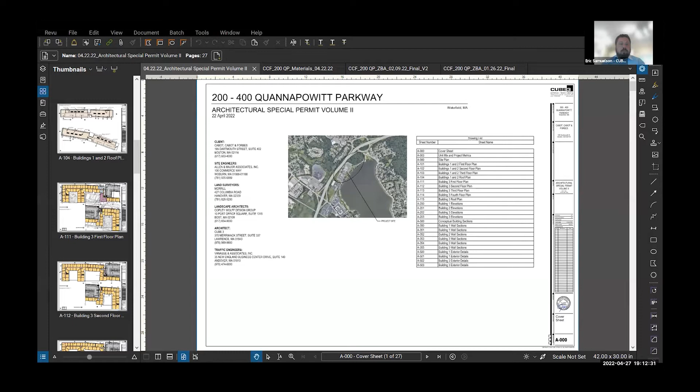So this is our special permit set that we had pulled together with comments from Jim, getting into more detail. I don't know if I need to go page by page through this. I certainly can if everyone would like me to. But the biggest changes from our perspective have been the building 3 elevations. I think the biggest one we were looking at was this west elevation along 95. I think correctly, a couple of comments were saying it looked a lot like an office building, too commercial.

It didn't have any real residential feeling to it. So what we did is we worked to carry the language that was on the other side of this building around the backside here. There are a lot more balconies, more kind of ins and outs with shadow lines, as well as working on the garage facade to give that some texture and feeling as well as it comes across.

So we did some work here. I think we got to a pretty good place with this. The other 2 elevations were the other 2 ends of the building. We had similar comments, and we worked with Jim on doing something similar where we try to carry the design language around and use the same materials, make sure we have balconies and ins and outs, so that this felt like a residential place.

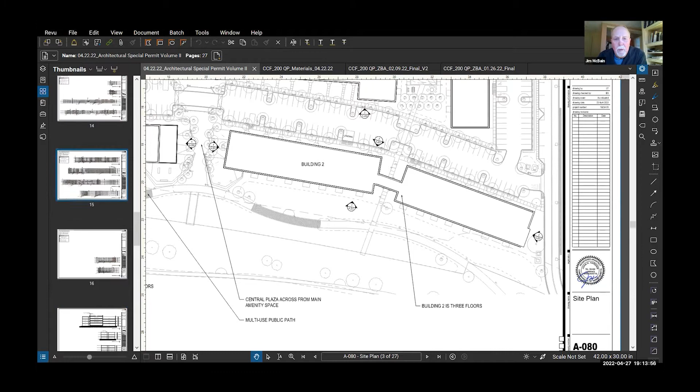So I'll pick up for a minute there, Eric. Yeah, absolutely. As noted, we had several meetings. What you see before you now is, at the bottom, basically the left side, center, and the right side. If you look at the middle sections, you'll see it's just a monotone of windows and a monotone of color on the 128 side. So this has been broken up, with more balconies and a change of color that represents a closer tune to what happens on the rest of the building.

And reflects something more residential than not. We also talked about the ends of this building, which didn't have much, had the same sort of architecture that 128 did. But we gave it, based on my comments, a better edge on those 2 edges. So whether you're coming down the highway or up the highway, you see a continuity from the rear to the edges, and then the continuity continues around to the front. So I'm quite pleased with how this has come out.

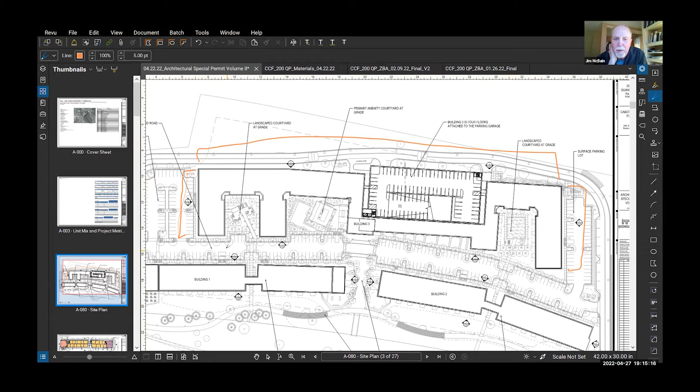You might note one other thing is on the garage. Eric, if you could pull that garage elevation up. It's not just a bunch of decks — it's actually got a detail to it. It looks like little trees, or whatever you want to call them. If anybody's been over to Wellesley College, they've probably seen the copper tubing that runs around one of their garages — well, I say new, it's probably 20 years old now. This is similar, but not copper tubing, obviously. It sort of breaks up the whole garage texture and almost gives a forestry type of appearance.

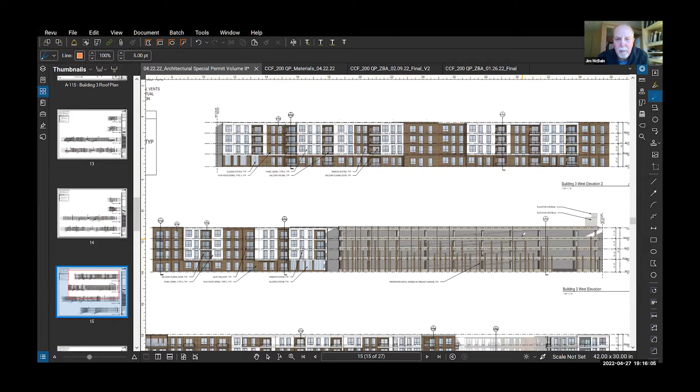So you get a break between what's on the right and what's on the left, and this other element, the garage in the middle, is quite helpful in pulling this together. So I'm pleased with that. Also, as noted earlier by Brian, they've gone through and done cross sections for me, with details and dimensions, so we have them as a guide going forward — when the full details come out, we know what we're getting at this point.

So from what I've looked at here, this package architecturally is in much better shape than it was. I should note the elevations weren't drawn in full originally — there were just some renderings on this side of the building. Now we have the full drawing of this side of the building, which we really didn't have before. So as far as I'm concerned, architecturally, we're there. Thank you.

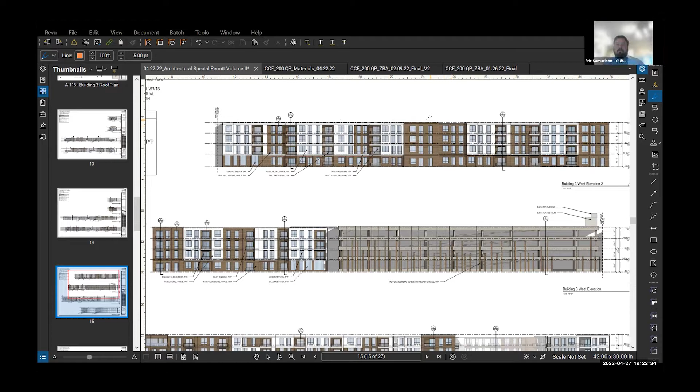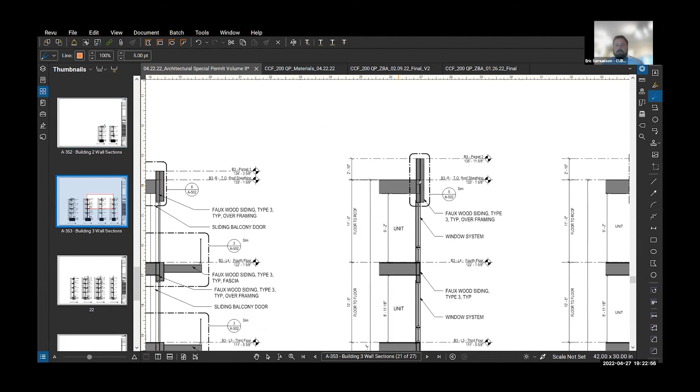Eric, what sort of a parapet, what color, what would it be made out of? Would it blend into this, or would it be? It's this material here. Okay, the material would be consistent, and the roof line would be a little bit below it, behind it. 2 feet, 3 feet, 1 foot? Depends on the area, we have a lot of that detailed. For example, in our wall sections we have all of that. So this one here, you're seeing it's 2'10". Your material would carry all the way up here, so you're not getting a change in material as it gets to the parapet. Okay, thank you.

Anyone else? Okay, what's next, Brian? So if I can ask on this garage issue that Greg raised, is it the board's inclination to see how it looks on the rendering and then go from there, whether you want it thickened up or not?

Does that make sense? I think I would need to, and it sounds like maybe others do too. I think if they put the trees in, there's not that many trees there, but the landscape, once it's in, might show a little bit of contrast.

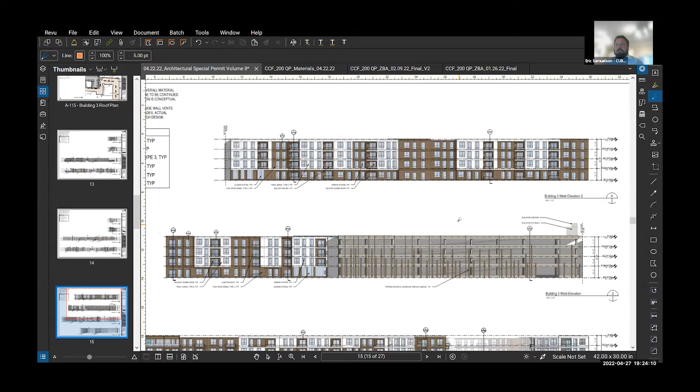Yeah, we can certainly show that. I think one thing I do want to note is that this is an open air garage. If we were to further enclose this side, we would have larger mechanical equipment on the roof to ventilate the garage, and that's not something we want to do. It's not good for the garage or the residents. Open air is better from that regard.

Is that because you'd be putting more of these little tree-like openings up there? Yeah, you need a certain percentage of openings around the garage, so you would have to have more ventilation. Yeah, once you cross a threshold, I forget the exact percentage, but once you cross that, you need to mechanically ventilate your garage.

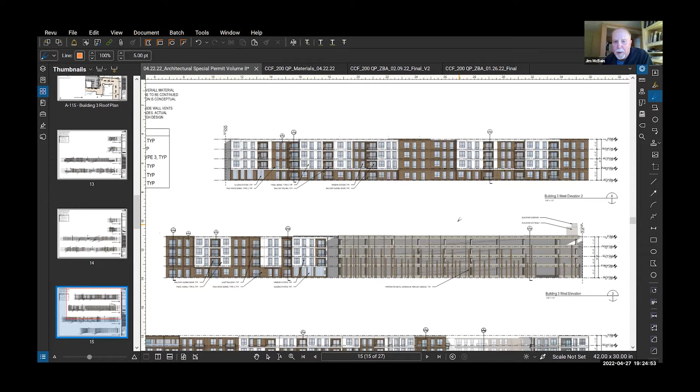There's only one side towards 128 that's open, everything else is enclosed by the building. We do have setbacks on the sides of the buildings between the garage and the building on both sides that allow for fresh air wells between them, and that space there, and that space there.

If it looks anything like that Wellesley building, I remember when they first did it, it was gleaming. This probably won't gleam, but it would be nice to get a better handle on it. Okay, so we think we can get a look at that next time. Yeah, you think you can do that, Eric, within a couple of weeks? Yeah, that shouldn't be a problem.

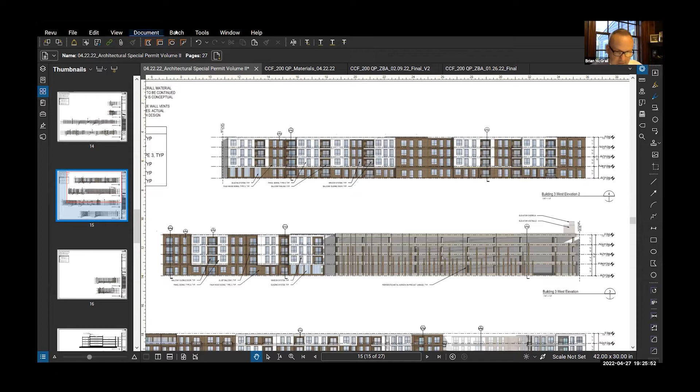Okay, great. Moving on, what we also submitted in our packet last week was the Quannapowitt Parkway improvement plan. That's kind of a boring plan that was really specified by the town engineer, who, as you know, Mr. Chair, is satisfied with it. Do you see a need for me to bring that up? Because it's more like cross sections of roadway and stuff like that. I don't need to see it because I've read and reviewed it, and I'm familiar with some of those details.

But do any other board members have questions about that material that Brian sent us? If so, bring it up and let's try to address them, but if everyone's satisfied, I don't see the need to go through it again. This speaks to the on-site and off-site work. There's going to be some plans I do want to bring up, which I think are important.

The next thing is we submitted a materials booklet. We had gone through materials with you before, but now we have a booklet that is formalized and submitted for the record. I'm happy to go through that, but you've seen most of the materials, so it's up to you if you want me to go through it in detail. It has been submitted. Do we need to show it to the public? Happy to do it, we can go into as much detail as you want.

If you want to bring that up, just note any changes. Because if we've all seen it before, and it's been in public hearing before, but if something changed, maybe point those out. I don't see the need to go too deep, maybe just give a brief review.

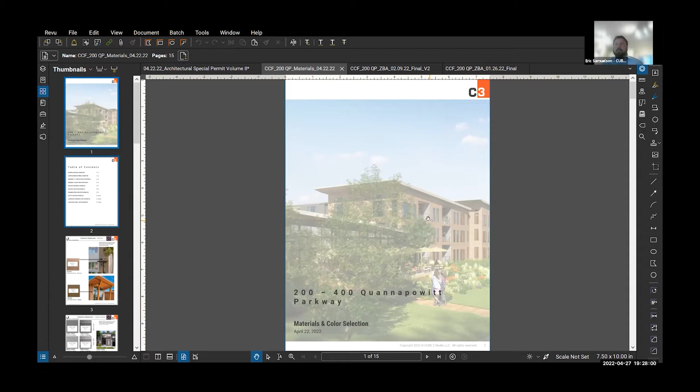So this was submitted. Again, I'll breeze through this. If you guys want me to stop at any point, please feel free. We have a table of contents here.

So for exterior materials, this is the Nichiha we were looking at. It's a vintage wood look. These two images are not of the proposed building, but examples of this product being used on completed projects.

Same thing here. We have James Hardie, a mixture of vertical siding, which is a panel, and some plain lap siding. Some examples on other buildings.

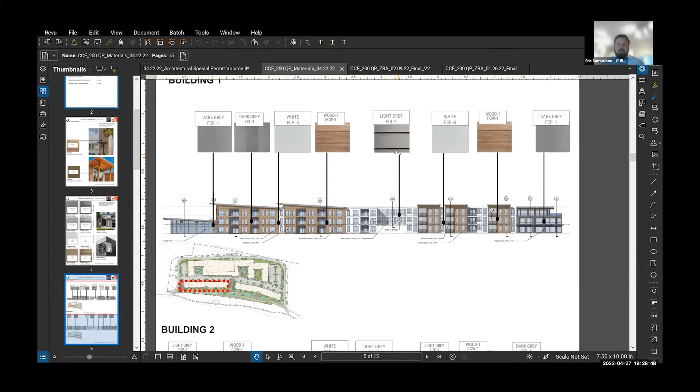And then we just go into more detail with each of the buildings, calling out where these lie, and these also tie back to the permit package that we put together, and there's material tags that tie all this together. So this FCL2, for example, you can see where that's tagged throughout the permitting package. So everything is all tied together.

And building 3. And then we just show some various examples of what we're thinking for the balconies, wire mesh balcony railing, some composite decking, the fiber cement trim and soffit detailing around the balconies.

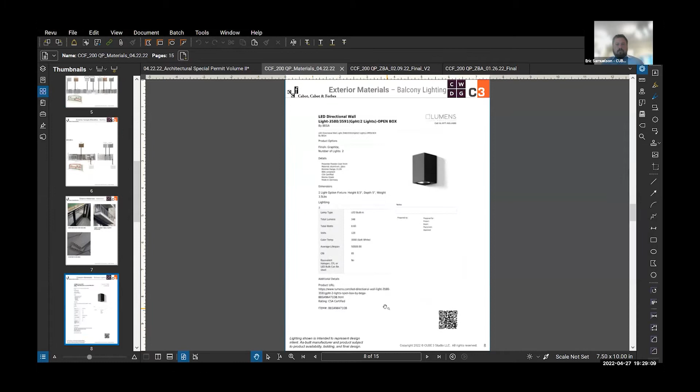Some examples of lighting at balcony that we would propose, building entry style lighting. We have some soffit lighting that would be, a lot of times at the entry or at the breezeways. We have landscape lighting, site and area lighting.

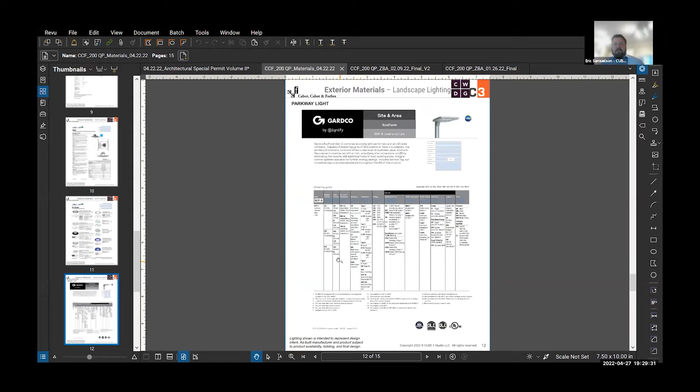More landscape lighting. There's going to be a variety of different lighting for the landscaping. And then the one thing I think we did want to note, Matt, was that all of the landscape lighting, I believe, is dark sky compliant.

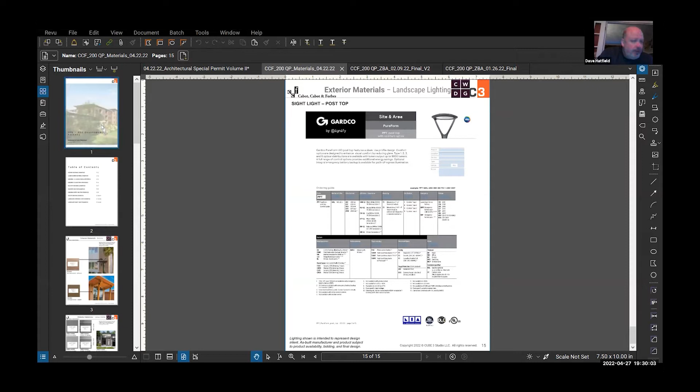Thank you for that. Yep. Eric, you don't have anything on the new garage, right? Is that too soon for that? With that material you just showed us today? For the material on the garage? Yeah, I don't have a material for it.

I can show you an example of a product we can use. I can come prepared with that. There are manufacturers, it would be kind of a screening specialist, I guess. They do a lot of those things, and it would be custom for this project. We need to add that to this booklet. I can certainly bring an example of that. I don't have it in the booklet, no. No, but we need to add it. Yeah, yeah, okay, yeah, that's fine.

Okay, any other comments, questions, board members? Okay, next item, Brian. Great. So thank you, I need the screen.

So as I mentioned, there's one plan. I think it's important. Let me just find it first. That was submitted, not that they're not all important, but this one in particular. Here we go. Hold on, give me a hard time for some reason. Here we go, okay, can you see that?

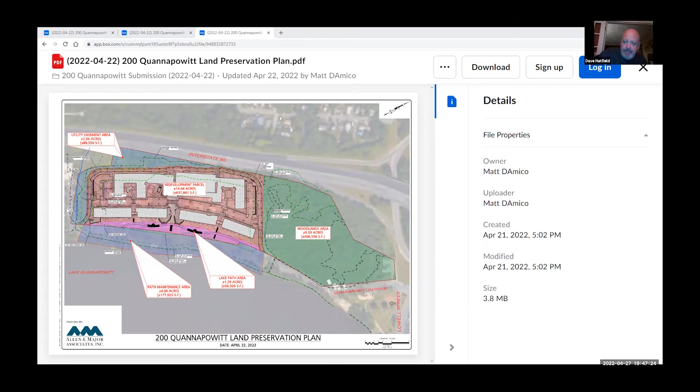Okay, appreciate that. Board members, any comments, questions? No, no. And Mr. Chair, I think that goes along with...

Potentially all the plans that we've been getting, there should and needs to be a plan reconciliation. And just making sure that we don't get caught short, and make sure we know exactly what we're getting or what we're voting on when it comes to voting.

And unfortunately, there's only one guy that I think should handle that, who just made a scoffing noise. But Jim usually tends to do that, to make sure that the plans that we've okayed or have seen, since he's usually often the one that takes the building set and compares them. So I would move that we allow Jim to work with the petitioner as he did with the 128 side and stuff, just to make sure that we got all the correct site plans, all the right plans. Architectural, landscape, they're all up to date. Yeah, they're all consistent, and they're tied into Concom and all these other questions, which just kind of came up.

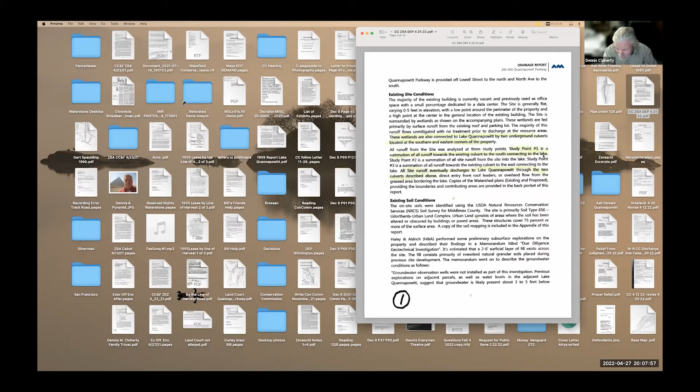It says all runoff from the site was analyzed at 3 study points. Study point 1 is a summation of all runoff towards the existing culvert to the south connecting to the lake. Now, I don't believe that's a true statement because Mike Collins, when I was on the Quannapowitt Study Committee, gave us this map, and it showed that the outside on the lakeside was 187.54. On the inside culvert it was 185.46.

Now water doesn't flow uphill, and that means the water is going this way. And here is Richard Hartley from Fish and Wildlife Massachusetts, and he says that if I call your attention to, there are over 20 pipes leading into the lake. Walker's Brook is no longer entering the lake, and there's elevated lake levels.

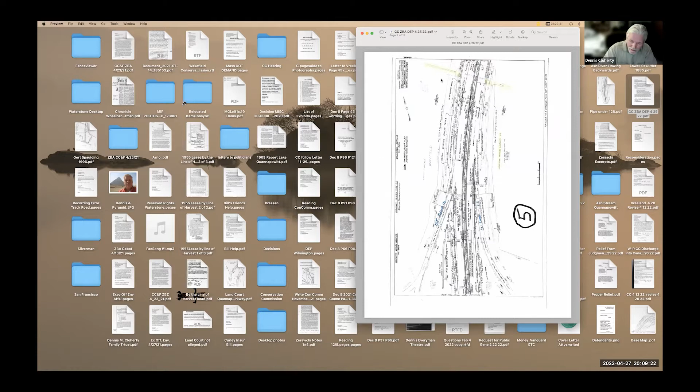And here's a picture of the so-called outlet, which shows the land above the culvert. And here is a picture from Mass DOT showing the water flowing towards the Reading drainage canal. You see the direction, the arrows there? Yeah.

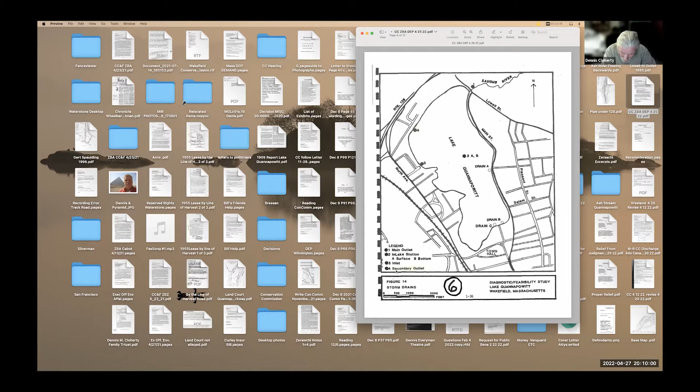And here, Camp Dresser and McKee did a study for the town of Wakefield, and they listed, it shows the main outlet at the Saugus River on Lowell Street. And they said this was a secondary outlet, number 4. And I live in the old fairgrounds, and my property is connected to the lake by an underground pipe.

And my concern is that if the Quannapowitt Parkway is elevated, then that water will drain towards my house. And if I could show you, there's an intermittent stream that flows by my house. That's my back porch, it goes down here and it goes under the highway.

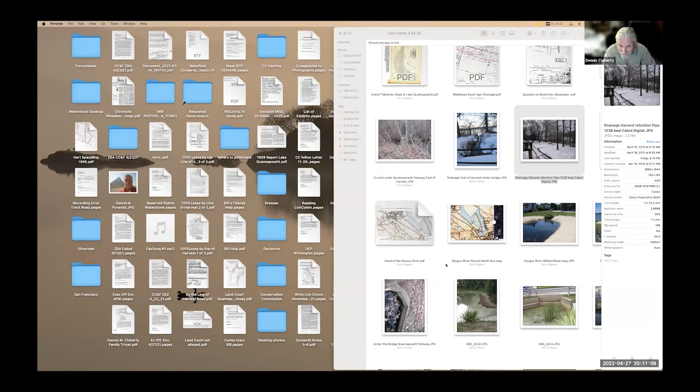Before, this is the Wakefield Reading Fairgrounds subdivision. This is taken up. And this is a map from 1911, and it shows the intermittent stream that connects to my property.

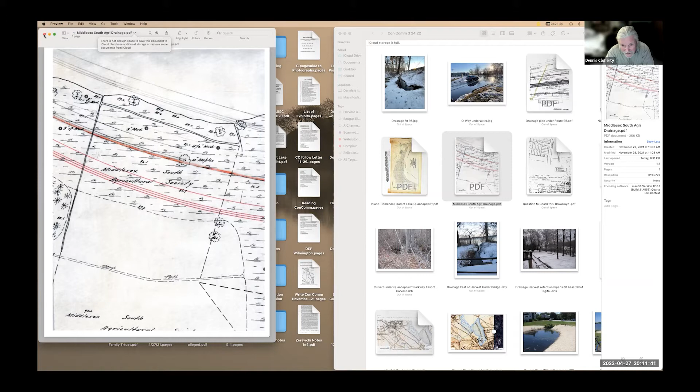And the water is now coming from this development, this planned development, is coming up the Mass DOT drainage ditch. And it's getting very close to my property.

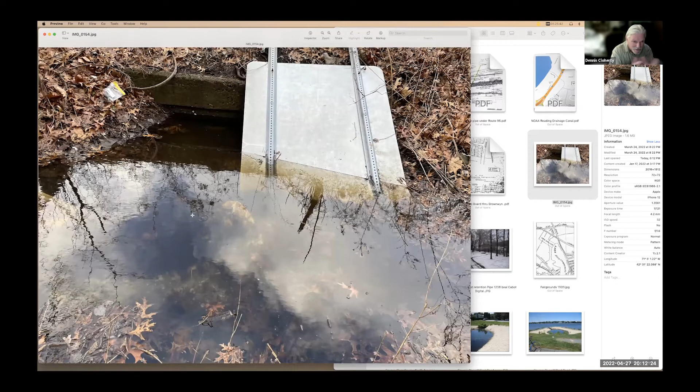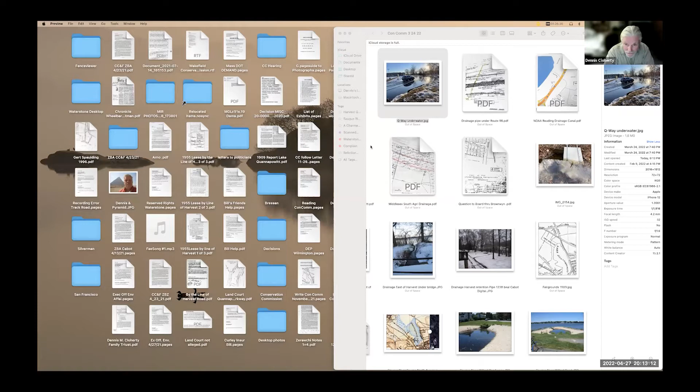And here is the end of the property. This is where the drainage pipe comes out, and the water gets higher and higher. And I'm afraid that water is going to come onto, if the land is elevated, that the water has no place else to go but into that drainage pipe and onto my property. So if there could be a solution found to the drainage problem, I'd very much appreciate that. Thank you for your time.

Okay, thank you, sir. Anyone else? Seeing no other hands, we'll close public testimony for the evening.

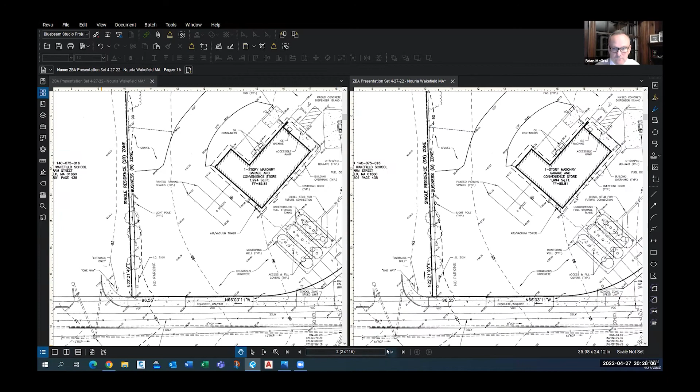Great, so this kind of shows that we want to try to get as much landscaping as we can. We're really improving the landscaping, putting a good grass buffer on the perimeter of the property, some shrubs on the other side where there's really nothing but scrub trees, and really fixing up along Vernon Street. And as I've mentioned, there's a significant planting area on the front of the property. You can kind of see the new layout.

There'll be a new building, and the pumps are more properly aligned compared to the way they are today. I think this might be a good opportunity, Chris, if you want to hop in and give an idea of the layout and the parking, etc. That would be great. Sure, thanks, Brian.

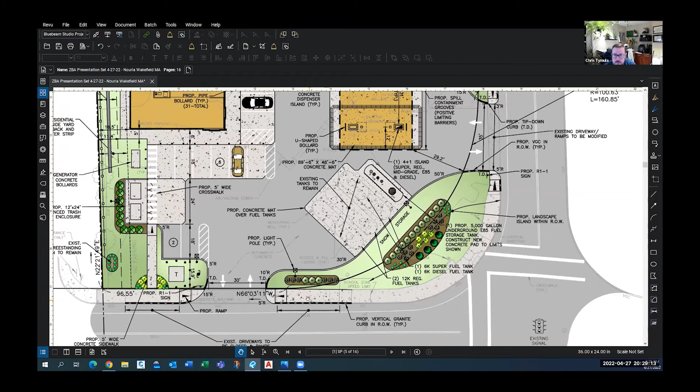As Brian mentioned, the two curb cuts on Vernon Street will remain. We are removing the first curb cut located close to the intersection, and providing a new 30-foot wide full access curb cut further from the intersection. Overall, we'll have drive aisles anywhere from 24 to 30 feet wide. We'll have 18 striped parking spaces, with all the parking spaces against the building protected with bollards.

Obviously, as you can see, the green is the landscaping all around the perimeter. We have a fenced dumpster enclosure, also screened by some landscaping. We have some low growth plantings along the sides of the lot, up at the top on the side. And as Brian mentioned, this is the landscape area we're showing within the town right-of-way.

Overall, we feel it's a significant upgrade to what's out there today. We obviously have a full set of plans, everything from a demo plan through details, erosion controls, full stormwater management. I don't think we want to get into all that this evening. I just want to give the high level picture of the development.

In addition, there's a chain link fence running along the back and the side. We are removing that chain link fence and providing a new 6-foot high stockade fence, a solid stockade fence. There are existing freestanding signs located here and here; those would also remain, but just be refaced with the new Nouria brand image. And altogether, we feel it's a significant upgrade to what's out there today.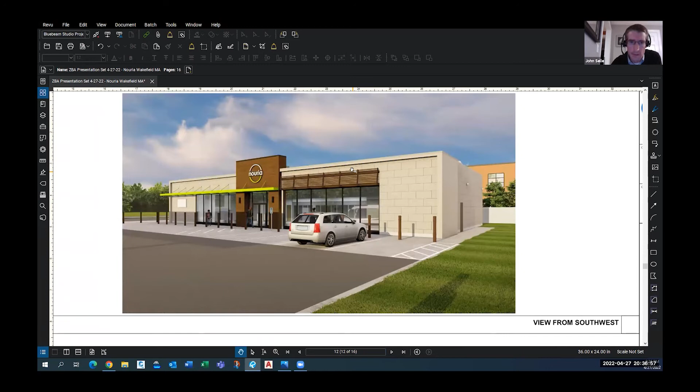You're seeing the main entry accented by the wood-look material and the raised height parapet with the Nouria logo signage above the branded Nouria green trellis canopy element. Again, these large floor-to-ceiling storefront windows really bring a lot of light into the store. The whole theme of the Nouria convenience store is this light, open, airy, contemporary take on a convenience store — a fresh, clean, modern approach. These large windows and high ceilings really contribute to that.

The materials used on the exterior of the building are high quality, durable, low maintenance materials. What you see on the main facade in the beige block is a Nichiha cementitious panel with a texture and panel proportion that replicates a sandstone look. On the main entry piece with the higher parapet, the wood look is also a Nichiha material — again cementitious and low maintenance, but replicating a wood look at the entry. On the sides, flanking the front elevation, we have some EIFS material that runs vertically and gives relief to the side elevations of the building.

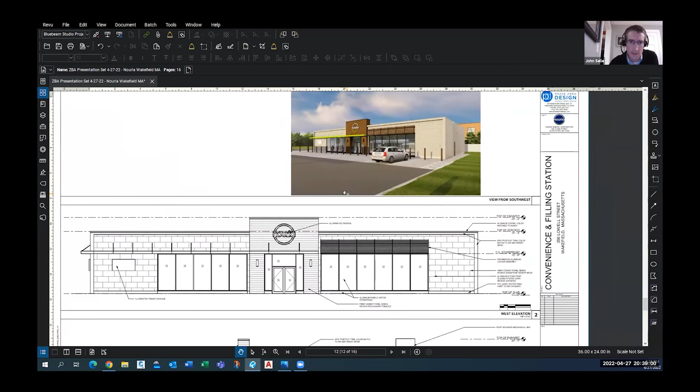If you zoom back out, just to give a sense of the drawing: we have the front elevation here in the middle, and below that, one of the side elevations. Next page.

Looking at the front a bit from the left-hand side, you can see that trellis wrapping around the corner. The sandstone Nichiha panels wrap the front of the building, and they wrap around the side and rear of the building as well. The back side of the building, shown on the bottom elevation of the sheet, uses the same material as the front. It's back of house, so of course there's no storefront, but no change in materials there.

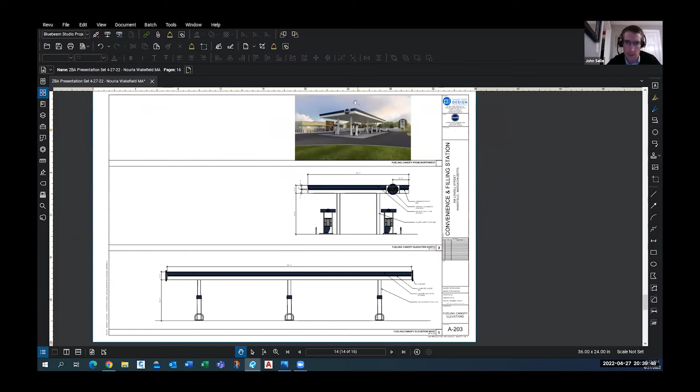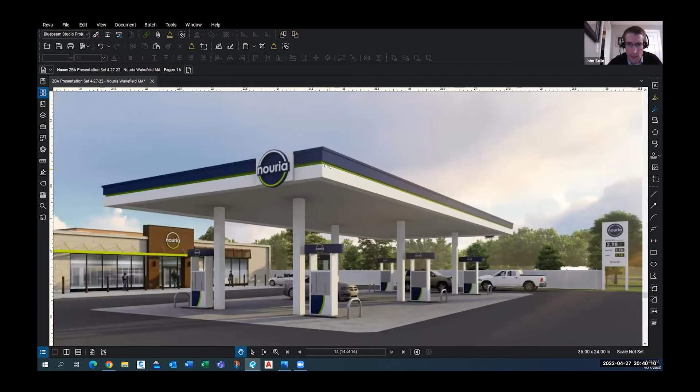Okay, so that's an overview of the building. Next, I'll give you a sense of what the fueling canopy is proposed to look like. The Nouria branding on the canopy is two-tone — Nouria blue at the top with a white stripe below, and in between, the Nouria branded green. There's an illuminated green accent band that runs around the canopy, and we have Nouria logos on either end of the canopy facing traffic as it comes from either direction.

In this view, you can also see the freestanding sign in the distance on the right-hand side. As mentioned, there are existing signs at the two locations, and we're proposing to reuse the existing sign structures and simply reface those signs with the new Nouria branded signage.

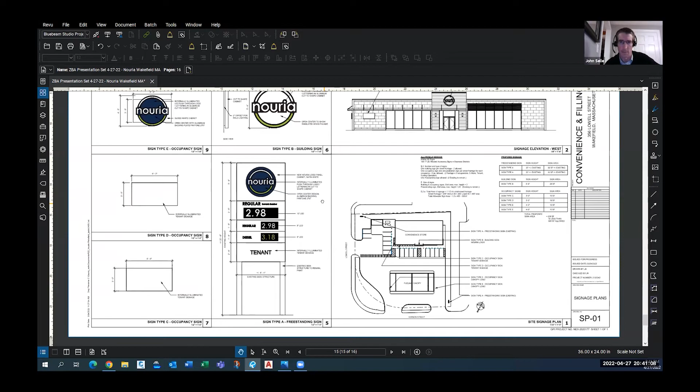The next page in the set details the proposed signage for the project. We have the two freestanding signs, again maintaining the existing structure but reskinning those and updating the fueling price signage on those. In addition, on the building we have the building sign front and center over the entry, which is the Nouria logo.

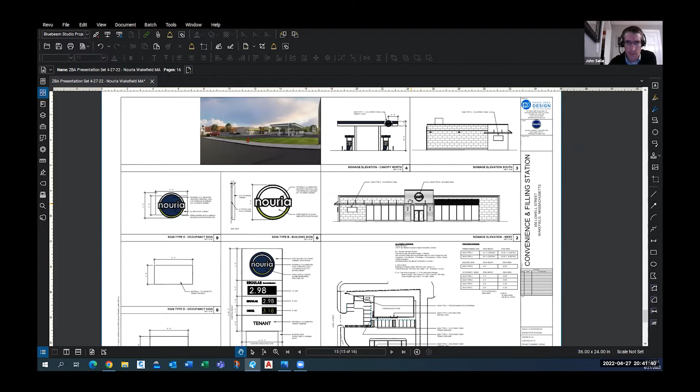We have two smaller signs on the building itself on the front elevation. On the left side of the front elevation there's an occupancy sign for the tenant on that face, as well as, turning the corner from that sign, another tenant sign for that co-brand offering that will be within the store. And then signage, the logos as mentioned, on the canopy itself, two Nouria logos, one on either end.

That's the basic overview of the building, canopy, and signage. Happy to answer any questions folks might have.

I have a question. Who's Nouria?

Sorry, Mike, I'll keep going. The new convenience store gas station at Logan Airport is a Nouria convenience store. They were selected by Massport to develop on that location, and that has become their flagship location. But they have stores throughout Massachusetts, New Hampshire, and Maine.

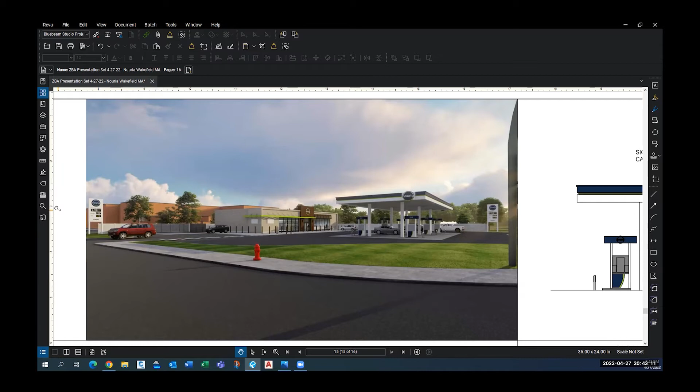Mike, you'll be able to tell us better - how many locations, 60 plus throughout New England? There's over 165 locations, which are a combination of our Nouria convenience store gas stations and Golden Nozzle car washes.

Okay, so a couple general comments that I would make. One is we've never allowed diesel anywhere in any of our gas stations that we've approved before, so I'll be curious to see what traffic advisory has to say about that. Two, there's another competitor that tried to have a glowing band around their kiosk as well, and that didn't happen because it looked like a UFO about to take off. Just kind of general comments there.

This reminds me, layout-wise, of the Cumberland Farms we just approved - not just approved, but that went in a number of years ago down by the head of the lake. It has that almost same exact feel.

One of the things where Brian was mentioning the landscaping in front - it's great to come in with that idea, but I'd be looking for what the commitment's going to be. Right down the road you actually have a great example of who does a super job with it: Prime, shockingly to me. But maybe there's a chance for some sort of height, stone wall, or something in this front corner that could differentiate this from just a big open parking lot.

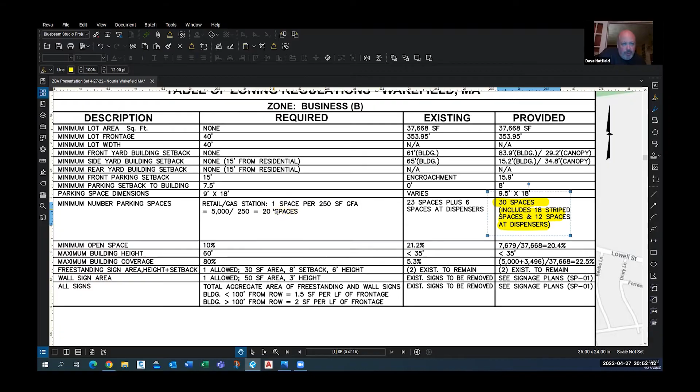Okay, for the board to determine potentially whether we would count them or not, or whether it satisfies the requirement. We did receive correspondence, while other board members may think of other things initially.

There was a letter from GLD speaking specifically about those level 3 DC chargers, asking whether they would be considering it. That was from David Paulson. I don't know, Brian, if you've seen this correspondence. Gail was kind enough to forward those to me, so we just got them recently though.

And then from the town engineer, there's a bunch of comments, several pages for you to go through to see if there's things we need to account for in the plans or make adjustments. Concom had some comments too, even though it's not under their jurisdiction. They had some thoughts, recommendations, and concerns. So again, we'd welcome your thoughts on any of that if we need to account for it.

And lastly, did you get this one as well, from an abutter across the street? Ann Martin, I think she either leases or owns an office located directly across the street. This speaks to the school and a number of parents who tend to use that parking space area for school pickup and drop-off, mainly pickup I imagine. Some of that overflow extends across the street, and she's concerned that if we grant relief with fewer spaces, that's just going to make that problem worse potentially.

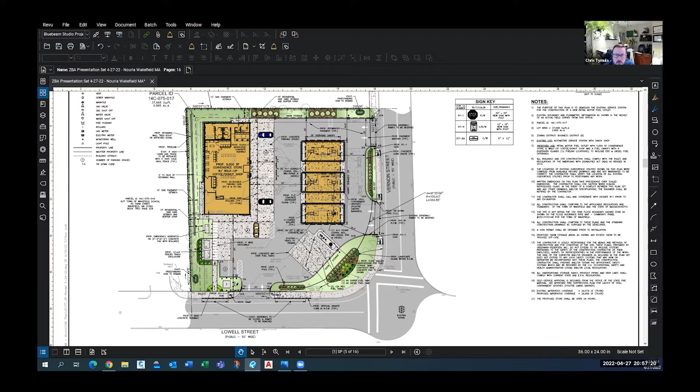Thanks, good comment, Jim. Yeah, we should probably look at that. Maybe look at it if we can add it somewhere. Okay, anything else, board members?

So at this time, we'll open up to public testimony again, based on the overview we've heard of this project, the information presented this evening. If you have a comment or question, please raise your hand in the Zoom meeting and I'll call on you in order. Seeing no hands being raised, we'll close out the public testimony for the evening.

All right, so Brian, two weeks and we'll continue the discussion. Yes, and I will raise those issues at TAC on Friday, so they make sure that they discuss them and comment on them. Okay, sounds good. All right, board members.

Dave, I got one more comment just to make on past circumstances where we didn't want to trash the outside of the building with an ice machine, propane sales, or bundles of wood. We've restricted that sort of activity at this point in other places, just so they should know. Okay, thanks, Jim.

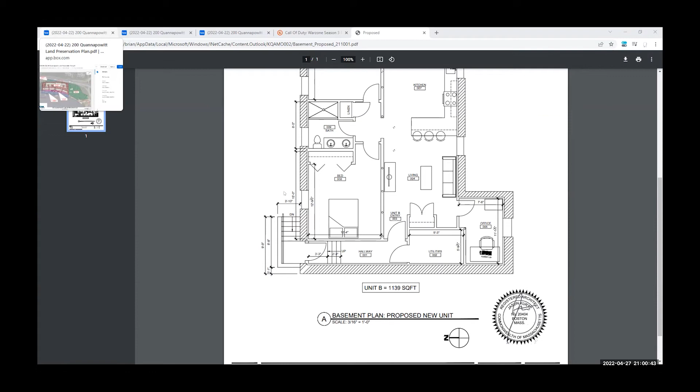This is the front of the property. Chris, are you with me? Yes, I am. Great, okay, make sure what I present is correct, if you would. Yep, because I kind of get confused by these plans. So in any event, this is the front of the house.

And the way this basement unit was presented, there was going to be a staircase that was going to come out here to the side of the property. And there's a couple of issues with this - the whole electric connections to the property are here, which are problematic.

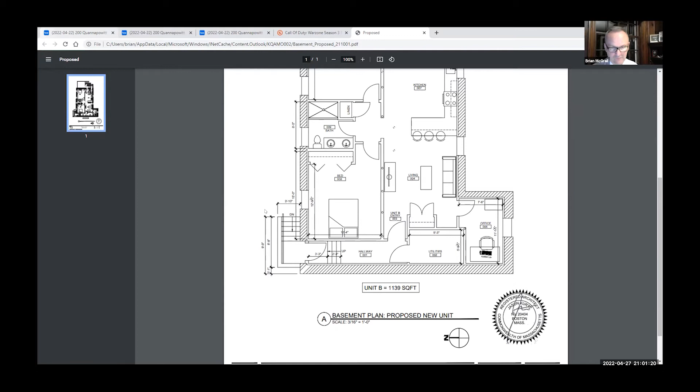And the second thing is it kind of leads this unit owner's main entrance out into nowhere land, where there's no lighting, it's just kind of an odd place. So what we're requesting to do is to make a modification to that entrance.

Someday I'll get good at this. Pro tip, have everything open on your laptop. Yeah, easy for you to say. Okay.

So we would like to move that - this is the front staircase of the house. We'd like to move it, as you can see, instead of coming out the side, so it comes out this way and just steps up.

So we'd like that unit to be able to come out the front of the property, so they're able to use the same walkway. It makes sense from a layout standpoint, and it also prevents interference with the electrical component. Honestly, this is the plan Chris really intended, but somehow the architect submitted an earlier version by mistake. We're throwing the architect under the bus, but he's not here to defend himself. In any event, this was really the intention, and we'd respectfully suggest it works better for the unit with no real visual impact. We'd request it as a minor modification for your consideration.

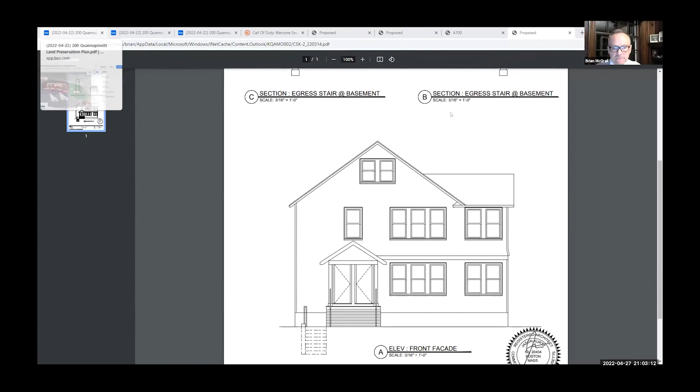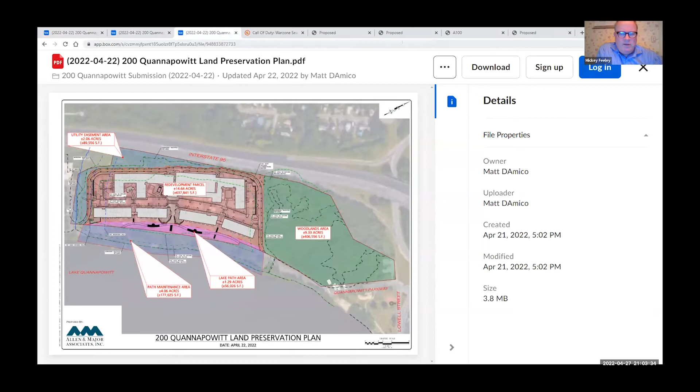These stairs go down, but here's the main entrance. And that was coming out the side before? Yeah, Mike. Are they changing the driveway from right to left or anything? No. That's how it was coming out before, Mike. See it? It was okay, kind of coming out the side and then you'd have to go around and then down and in.

So does that go under the other staircase, Brian? That's why I asked if Chris is here. Chris, can you clarify, the current one or the new one you're talking about? Both? Yep. So the new one comes out under it, maybe 4 or 5 feet. So the door is basically directly under the middle of the primary first and second unit staircase.

I mean, do we have a site plan showing all of this, like with parking and walkways and things like that? I can, hang on a second. There was, in the decision, basically a site plan. I'm trying to log on and get it. Take 2 seconds.

But my bet is you're going to show me a site plan that's not updated with this new front entrance. No, it's not there. Are you looking at it, Jim? Yeah, I'm looking at it. It only shows the front stairs. It doesn't even show the stair wrapping around the corner. So the site plan doesn't show this scheme or the previous scheme. It shows the building, shows the front staircase. It really doesn't show the back staircase either. It's more of an existing conditions site plan.

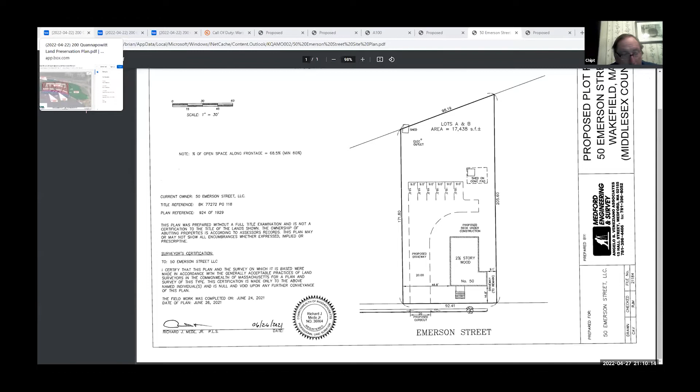But I mean, we don't have - if we were going from a 2 to a 3 - we don't have landscaping, we don't have walkways, we don't have anything, and that's not what's being asked for us tonight. So what we did, we approved it, we let it go by. So I do believe this is a minor modification of the entrance, but wow, this is not our typical case.

Is this the one near you, Mickey? Yes. Had work already started or something? There was something - yes, they were doing some work there for a while, and there was limited conversation with some neighbors.

Yeah, this meeting was in December, actually. We filed the - oh, that's what, okay, so this actually goes back. That helps. Yeah, the decision got filed a few weeks later, as Brian said, but the meeting for this was a one and done in December. But yeah, you're right, it was in Michael's neighborhood.

I don't know, bringing it back a little bit. Yeah, but I don't know. Like I said, I think it is a minor mod, what they're presenting. I just want to ensure that...

Yeah, we're gonna get a new basement plan. And what else do we need updating? Brian, what are you presenting? We updated - gave you the new basement plan. I think what you want is the site plan to show where those stairs come out.

I just don't know, Mr. Chairman, if we need to have the petitioner spend 3,500 dollars or even try to get a surveyor to update it.

Yeah, no, I hear you. What's it normally gonna prove? What's it gonna change?

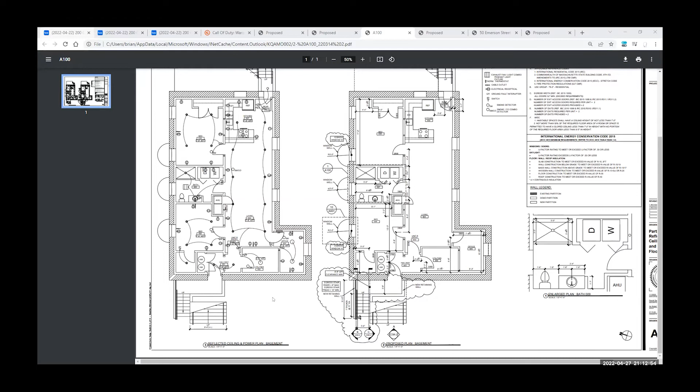Yeah, so the deck has already been signed off and approved by the building department. It's only 12 feet - a 12 by 20 deck. And I think the driveway starts at like 20 feet behind the house, so there's still like 8-ish feet or something like that, from back to part of the driveway. It meets all the specs we agreed upon in December, and it doesn't alter or take away any parking spaces.

All right, well, thank you for that. I'm back to thinking what's proposed is a minor mod in my mind, and we can just move forward with it. Anyone else?

It's fine. Okay, so what's the date of this plan? The updated plan now that shows - it's right here. This would be the best.

March 14, yeah, revision date, last revision date is March 14. On the right-hand side, see it? Originally dated January 1, 2022. Final revision date March 14, '22. Chris, this is the right plan, right? You can see it? Yep.

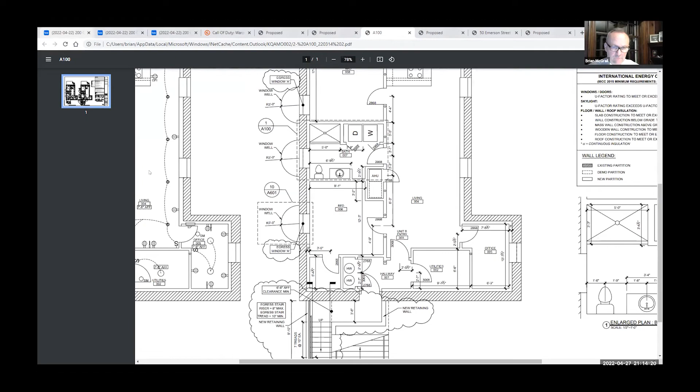Okay, anything else, board members?

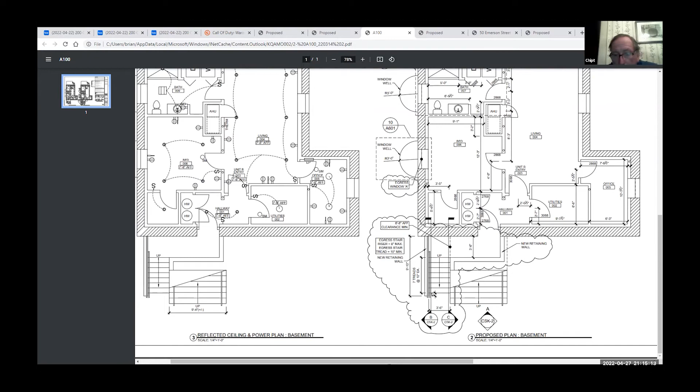I move, based on the information Mr. Chair presented to us this evening, with these plans dated 3/14, that I deem the change in eave location and the change in direction of the front stairs to come out the front of the building should be deemed a minor modification.

Okay, I'll second that. Go ahead, Tom. Thank you, Tom. Any discussion on the motion?

Minor modifications get approved too, right? Isn't it? You have to deem it, and you actually approve the minor modification, because you have to approve it too, right? Yes, we approve it as a minor modification. Okay, you just deemed it minor.

That was it. Okay, all right, regular voting members: Chip, yes. Jim, yes. Joe, yes. Tom, yes. And I vote yes, so that's unanimous, okay?

Thank you, Mr. Chair. Thank you, board members, thank you all, I appreciate your time. All right, thanks for your patience, have a good night.

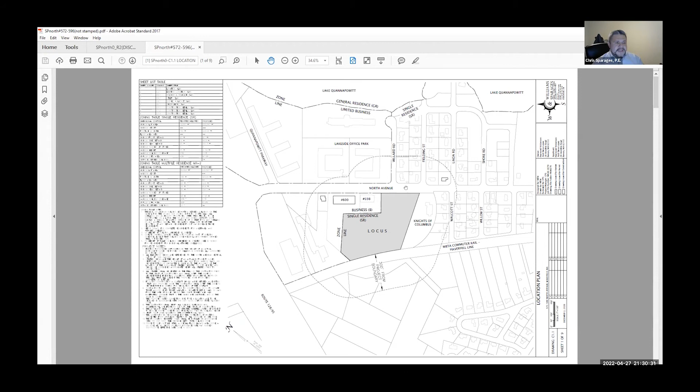We've already talked a little bit about the property in general. The subject property has an address of 0 North Ave, and in the near future we hope this will be 596 North Avenue. This is the shaded region here. We're a 5-acre parcel, just over 5 acres. North is up in this direction along Quannapowitt Parkway, and just to the south is the MBTA commuter rail. We're about 1/3 of a mile from our proposed driveway entrance to Route 128 over here, and then the town of North Reading, not too far from the other project discussed earlier tonight.

The topography on our site and existing conditions, here we are zoomed in a little bit. This is the development area, just on the northern side of this wetland line here. This is just under an acre of land that we'd like to develop. From a topography standpoint, all of our land slopes essentially from North Ave back onto the site and towards the wetland.

We have a topographic high of about elevation 86 here, and a topographic low down at a culvert at the street at about elevation 81. So it's relatively flat. We have about a 4 or 5 foot grade drop across the site in this fashion.

In terms of wetland resources on the property, we have a bordering vegetative wetland that's delineated here, which our professional wetland scientist delineated. So the property has a bit of wetland in the middle of it, and then on the back side, on the south side, is another upland area.

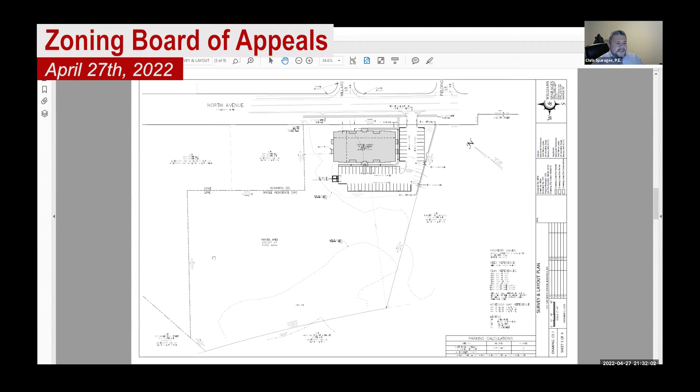This area shows a little bit better. I'm going to flip over a couple of sheets here. Here is the area of the property that's mostly wetland. Our property is about 60-40, so 60% wetland and 40% upland. There's a big upland piece back here, and then the piece up front that we'd like to develop.

Now, if I can share with you a more regional map, I just want to give you a little background on some of the questions raised by the town engineer and the Conservation Commission office. When we look at these projects, one of the very first things we do is look at regional maps, and this is the GIS map that the state maintains called MassMapper. Here is our project site.

It consists of these 3 parcels of land here. This blue area is that wetland I was showing you earlier. If we zoom out just a little bit, you can see Lake Quannapowitt come into focus over in this area.

So when we're looking at a piece of property for our clients, this is the first map that we pull up. We want to take a look at: is there a floodplain nearby? Are we near a drinking water supply or a tributary to a drinking water supply? These are things that might affect development, things we want to think about as we're developing a site, because when we have more sensitive receptors like that, we have to design our stormwater management system to a higher standard.

So you've heard a lot of talk about a surface water supply and the word Zone A. There is a surface water supply that some of the waters in Wakefield flow into, leading over to the town of Lynnfield. Near the Saugus town line is Hawkes Pond, one of the drinking water ponds for the city of Lynn. They pump water out of Hawkes Pond, over by Route 1, into some other ponds and up to their treatment plant way over at Breed's Reservoir, much higher in elevation than where we are back here at Lake Quannapowitt.

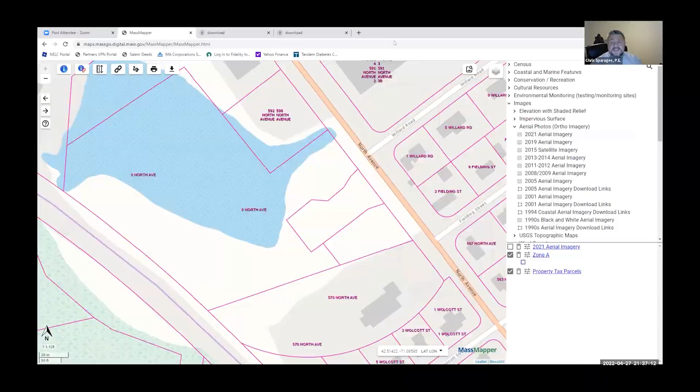We recognize this, and we know that Lake Quannapowitt is a tributary. So when we designed our stormwater management system, we took it to the next level. DEP stormwater management regulations require, as part of the 10 standards, treating water to different levels depending on what you're proposing and where the water ultimately discharges. If discharging to a tributary, that tributary and any bordering wetland are considered an ORW, an outstanding resource water.

If you're discharging stormwater to an outstanding resource water, instead of treating the first half-inch of runoff from hardscapes and paved areas, DEP asks you to double that and treat the first 1 inch of rainfall. In addition, because you're discharging water potentially underground close to a tributary, when you have an infiltration device near a tributary discharging to an ORW — we do have one underneath the parking lot here — normally you're supposed to treat water to a certain percentage of total suspended solids removal before sending it off-site, 80%.

If you have an infiltration device tributary to an ORW, or if you're in a critical area — and we would be if this was an ORW — they ask you to pre-treat the water before infiltrating it into the ground to at least 44%.

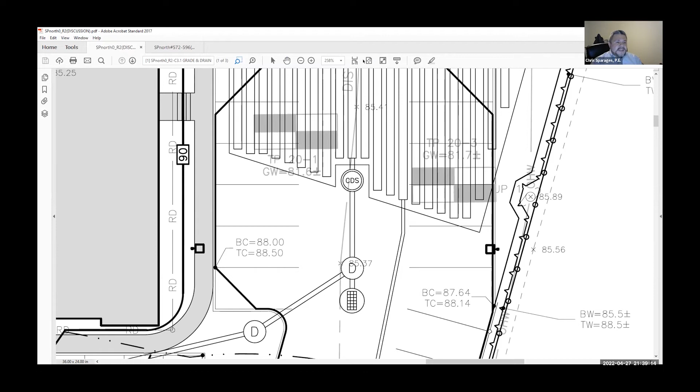Knowing we were relatively close to Lake Quannapowitt, we designed our stormwater management system to treat 1 inch of runoff from our paved surfaces. Through the use of a pre-treatment device—a proprietary treatment device right here, I'll go into it in detail in a bit—we're pre-treating our water before infiltrating it into the ground to at least that 44%. So the way we designed our system, we assumed that because this water eventually makes it into Lake Quannapowitt, let's treat it a little more, even though we don't have to.

Bill Renault and the Concom agents, Elaine and Rebecca, have reached out to DEP. I've spoken with Bill and told him who our contact is at DEP—a senior hydrogeologist in Boston. We've reviewed many sites over the years with this gentleman. He's in the drinking water program, and their focus is to identify and keep track of these tributaries and update the maps as new information comes along.

Sometimes tributaries are shown on a map and they're wrong, or they don't exist. We've had situations where we've walked sites with Bruce and he says there's no stream here, no tributary, you guys are good to go. We've had other projects where it looks like a tributary but it's not mapped, and we've asked what he thinks. We've even walked away from projects before with our clients, advising them to walk away because they were too close to something we thought was a critical area.

I've also reached out to Bruce, and if Bill, Rebecca, and Elaine would like to invite him out to walk this area and look at the streams running through the property, we're happy to do that. But we did a sort of preemptive thing to make sure we were treating our stormwater, assuming this might be an ORW anyway.

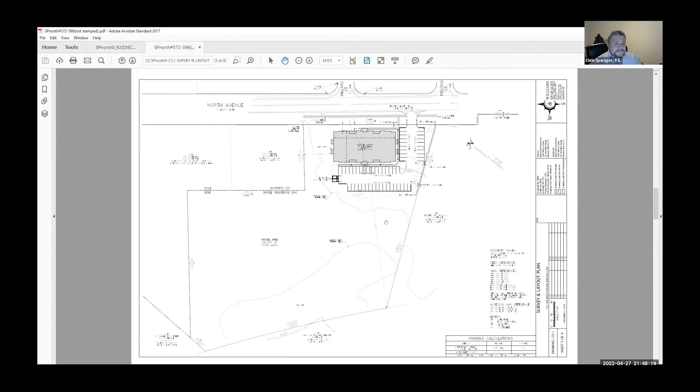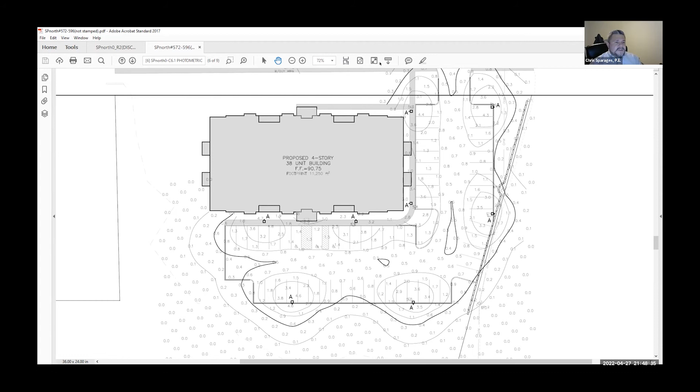That leaves the lighting plan. Again, the lighting plan is very simple because we don't have a very large area to light. If we scroll down here, we proposed 8 pole mounted lights, LED fixtures. We're still working out the details on the final design. They're between 15 and 16 feet high, and there are 8 of them located around the site to balance the light levels in the parking field. Those light fixtures are similar to other projects we've done recently in Wakefield.

So that's the end of my formal presentation, Mr. Chairman and members. I'm here to answer questions on the civil site tonight. Thanks, Chris. Board members?

I have one simple question to start. You could have more later, but people that move in here, don't you think they're going to walk around the lake? If they walk out the front door, do you really think they're going to take a right, go down that walkway, then take the left, and then not just walk straight to the sidewalk out front?

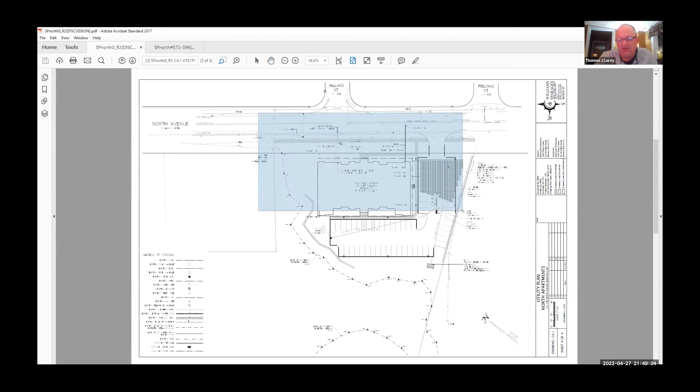Mr. Lucey, are you suggesting we want to maybe have a way to get them across the street? No, to your front door, to the sidewalk right in front of you, without taking a more direct path. People walk straight out the door. Right. That's a good point. This was even closer to the front before. That might make sense, and then eliminate this impervious surface here and have a shorter connection here. Yeah, I like that idea.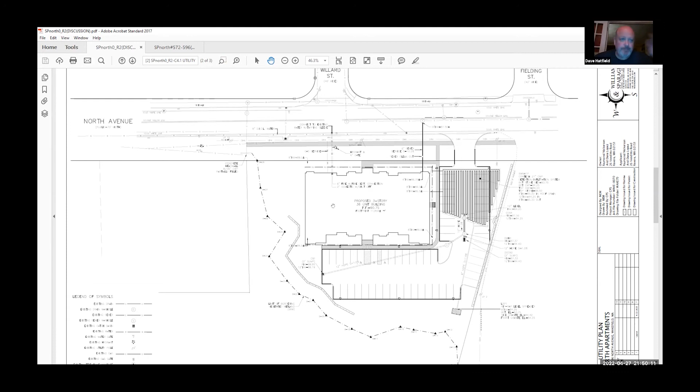Anyone else? Yeah, I guess it's time for me to weigh in. So flipping this front to back doesn't help this project, in my mind, architecturally or in relationship to the street. It basically just gives you a harder surface on the street as opposed to something a little more broken down. I could see this building broken up into 3 sections and slipped along the street, pulling itself back, so it steps away from the street as it goes south.

It would be better if that would happen. At the same time, the parking in the back, in order to allow for that, would be askew, more in line with the wetlands, maybe even extending the retaining wall more like what's happened at the spaces next door. This would give you something that breaks the mass of this building down and fits into what is a neighborhood of smaller buildings. It also pulls the building back, so it sort of becomes more aligned with the Knights of Columbus, at least pulling back that way along that edge. Not that the Knights of Columbus is something you want to make much of, because it needs a lot of help itself, but that's a different story.

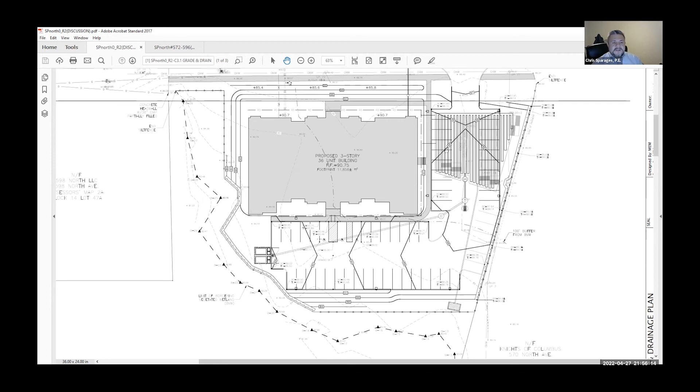The other thing I'd like to point out to the board members is that if it turns out that the streams flowing through the property turn out to be tributaries and have that protection, it's also going to handcuff us a little bit on stormwater management location. That's why you'll note our stormwater management area and the type we chose is an odd shape with these pipes. We know these streams have a bank, and if this is deemed to be a tributary, there are some limitations about what you can do within 200 feet of that bank.

Now, that's not the riverfront area. I know Jesse alluded to that earlier. There's a lot of evidence that points to this being an intermittent stream. This is strictly about the tributary to the water supply. You're not allowed to have a BMP, a stormwater management area like this, within 200 feet of a zone A. And that zone A will extend, potentially, 200 feet from the bank, which puts it very close to where we've got this guy here.

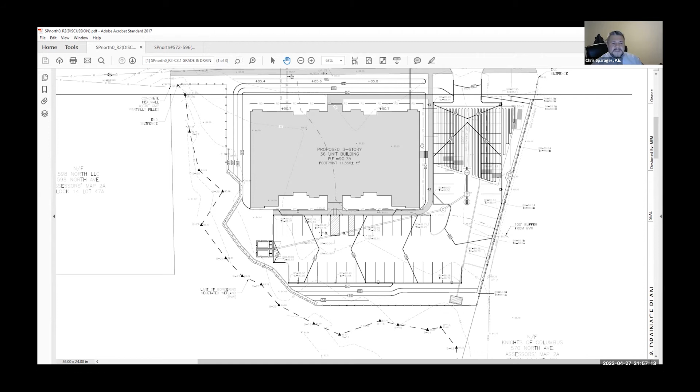So we're going to be hard pressed to move any of the building sections in this direction. Oh, I'm not even thinking of moving it in that direction, basically. Yep. And what you've already shown on those maps from the state, the physical blue area that showed water isn't even behind this site. It's more behind the next site over and goes up to the railroad tracks. So this may be wetland, but it's not where they've indicated the deeper area that probably holds water all year round.

So as already indicated, there's a lot of work here to do, and it's just a matter of working it through at this point. I don't look at this as pushing to the right. I look at it as pulling back from the street, but pulling it back in segments.

You've got to break the scale of this down, or maybe we need to make the building smaller. That's what I was going to say, Jim. You wouldn't be so cramped if it was a smaller building. So I know that's come up a couple of times already, that discussion about density.

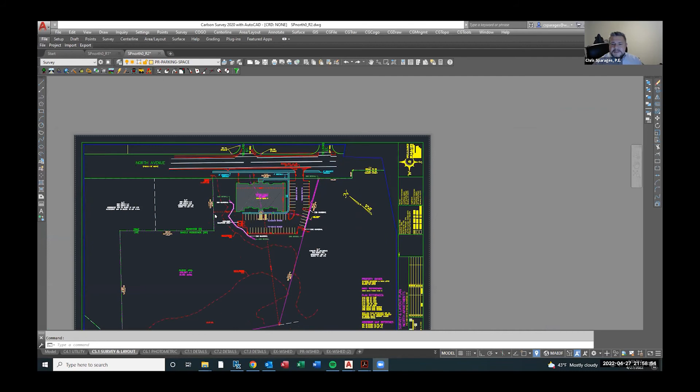I stopped sharing my screen just so that I could share another screen here real quick. This is our CAD drawing. Can everyone see that okay? Yep, yep. So let me just turn on something here, which will help us put some things into perspective.

So one of the things that we did in pulling the building back is that we tried to line up the front of the building with the other projects next door.

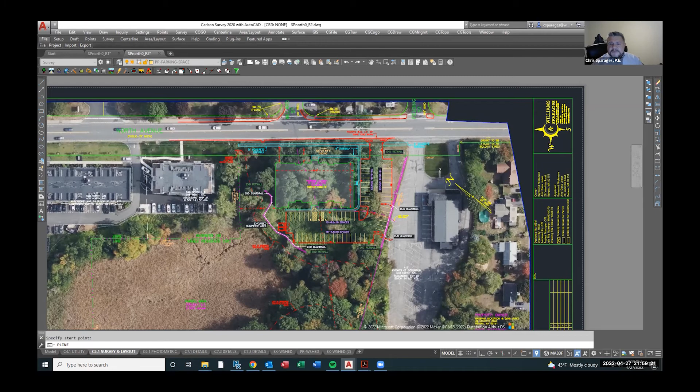I would also like to remind the board that the project at 598, which was approved for 18 units, was only built on about 15,000 square feet of land. And next door at 600, they had less developable area available than we do, with their units at 24. So with our acre, just under an acre here, we have more developable area than either of these two projects. And that's the reason why we have more units than them.

I don't think the site is cramped because we can fit an appropriate number of parking spaces with our building and maintain that setback to the wetland. But we'll take your comments under advisement, Mr. Hatfield, and go back with the architectural team and see what we can come up with.

And I would just say to that, land isn't exactly the same. It's not fungible. That's part of the difference here - we're talking about building into the neighborhood and breaking it down. It's not just plain density, not definitional density. So I don't think that's what we're saying here at all, that it's apples to apples - hey, this building fit, they have more land, so we could do the same here. You're building into a neighborhood now, and I think that's what's not being taken into account.

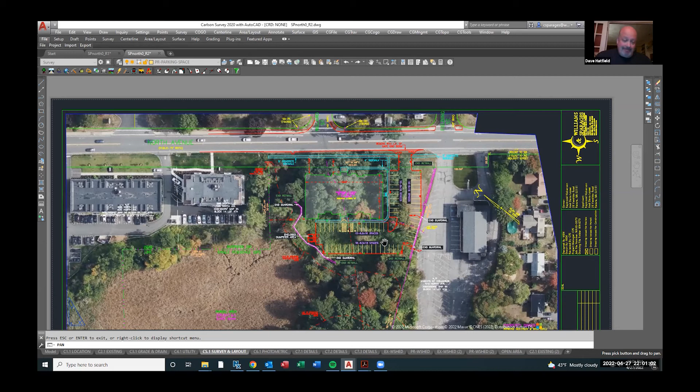And you've heard it from many abutters, not just these board members. Hopefully you're hearing it - they have serious concerns about the scale of this building being directly across the street from single-family homes. And to make it even more blunt, the other ones are not across the street from a neighborhood like this one is. I think we've looked at this 3 or 4 times now. I don't think we need to see this as reasoning for why we're building this size again. They need to take into account that we're now in neighborhoods.

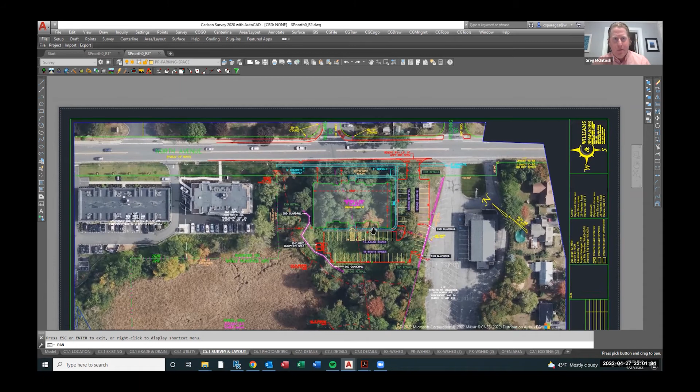That's it. We certainly appreciate all those points, members. What we look at when we design a 40B project is what are the relevant design precedents, and 600 and 598 create the controlling design precedents from our perspective. What this board is required to do under the Chapter 40B statute is to treat this project equally as it does other projects. So for sites that are designed similarly, 600 and 598 specifically, we're entitled to similar treatment.

Now, you make a good point, Mr. McIntosh, that this project site is closer to residential neighbors, although there's still a significant distance from this site, including across what I believe is a 4-lane road - no, a regular 2-lane road. That calls for certain different treatment of the design of this, and that's what we look forward to going into in the subcommittee, in terms of how to make this project look more appropriate, how to shield the massing through things like landscape architecture and building design elements to break up the visual appearance of the massing. So we'll go into all of that in the subcommittee, and we look forward to getting into those details.

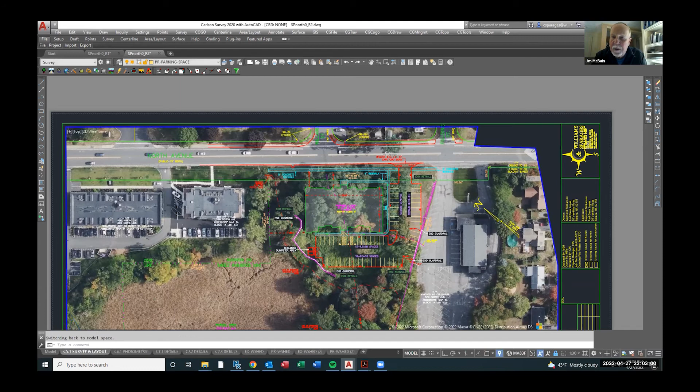This is a transitional site, basically into the neighborhood. So we have to find a way for it to transition into a neighborhood, which we've done on other projects - having buildings step into the neighborhood or step back from the neighborhood. And if you look at the plan in front of you right now, both across the street and down the street, you need to somehow step into that area and mitigate. It's the sort of bookend to the two other buildings, and you've got to treat it as a bookend that's a transition piece to the neighborhood. Now, how many units end up in there, how big a mass it is - that's something that has to be worked out with the committee, and whether it will work or not.

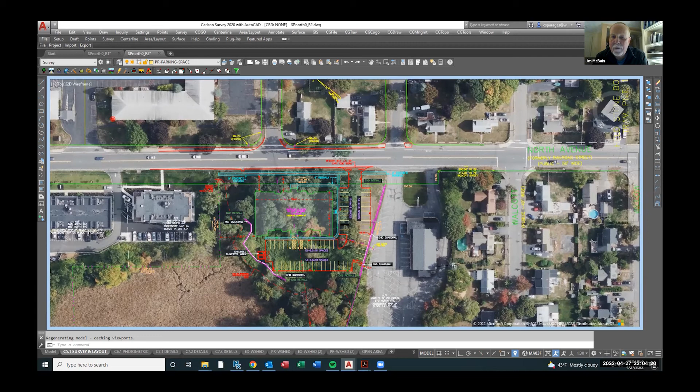And at this point, it seems to me we're just barely opening a door on what can fit in here and how it might master plan itself out on this site, and still allow for the architecture to shield itself, or mitigate its appearance on the neighborhood. There's trees and color and all the rest of the stuff, but we need to stay within the massing of this and how the master plan and massing works out on this thing. Anyone else?

Okay Jesse, was that the extent of the updates for tonight? I believe it was, Mr. Chair, unless the members would like to see the conceptual sketch that Phoenix is working on. As I said before, it's very preliminary, so it may be something to be left for the working group subcommittee. I would say it should. Okay, then that concludes our presentation for tonight. Board members, anything else before we proceed?

Okay. Did not receive, I believe, any other correspondence for tonight. So I think we're covered there. All right, we'll open up the public testimony. If anyone has a comment or question, please raise your hand in the Zoom call, we'll call on you at this time. First hand I see up is Dennis Clarity.

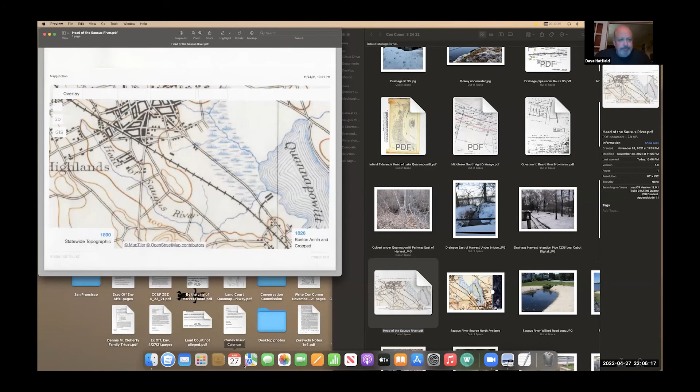Dennis, I think we've seen this once tonight. Are you going to give us the same presentation? You're on mute, sir. Mr. Clarity, you're on mute. Okay, can you state your name and address for the record please? Yes, it's Dennis Clarity, 1 Harvest Road. Can you see that screen?

We can. Are you planning to give essentially a similar presentation of what we heard earlier this evening? Well, I'll be very brief. Does it relate to the site? Does it relate to this site? Yes, the information we heard tonight.

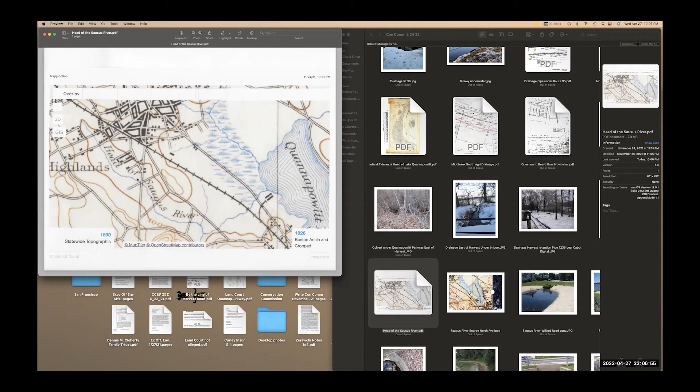Okay, it says the head of the Saugus River. It was a question as to whether or not this was a river or not. And it shows, this is the 1890 survey done by the Commonwealth of Massachusetts. It shows it as the head of the Saugus River. And then hopefully there's been a study since then, but okay.

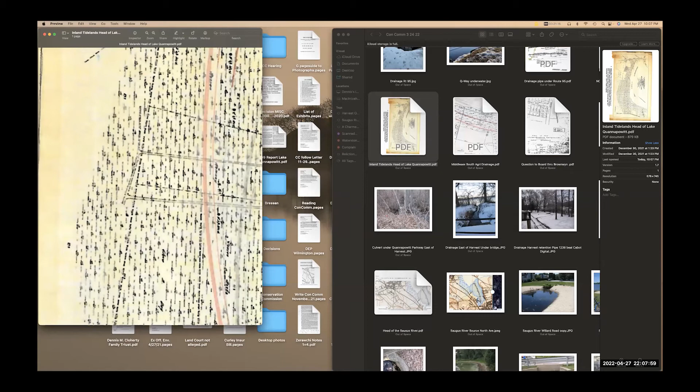Christine Vassapoli. Hi, my name is Christine Mihail Vassapoli, and I live at 9 Walcott Street, which is essentially an abutter. Trains going by right now. So that's where I live. So I'd like to address the issue of water that needs to be properly drained from that culvert that we've been talking about. We have 2 toddlers, and since the buildings have been built, we have so much water and overpopulation of mosquitoes that we can't really even take them outside starting late afternoon during the summer and end of the spring.

So we'd like to see, with the landscape, some sort of cistern or something like that built with the same functionality in order to help with the water. When the first building was built, it was constructed with a basement, I believe - I talked to the builders. The second building was built without a basement because of the water problem. After the second building, we started getting water in our basement in bad storms. So does this third building have a basement? What's the plan for the culvert? And also we'd like to know if the developer could post a bond to ensure that no damage, water or otherwise, would be done to our properties as a result of this new building. Thank you.

Jesse or Chris, do you want to address that? Sure, I can address that question. So we've dug test holes on our property that were witnessed by the town engineer in the vicinity of our proposed stormwater management area, so we know where the estimated seasonal high groundwater table is on our property. The bottom of our underground stormwater system that holds the water and lets it leak out slowly is set a minimum of 2 feet above that estimated seasonal high groundwater table. This building does not have a basement. We're going to be well above the estimated seasonal high groundwater table with all of our improvements. There's no requirement or really a need for a bond like the one that you described. Our charge is to make sure that we prove that we're complying with the DEP's 10 stormwater management standards, and the town engineer is going to do a good job with his office of making sure that we've complied with those things. We're professional engineers - Mr. Renault is a professional engineer, and it'll be thoroughly reviewed. Thank you.